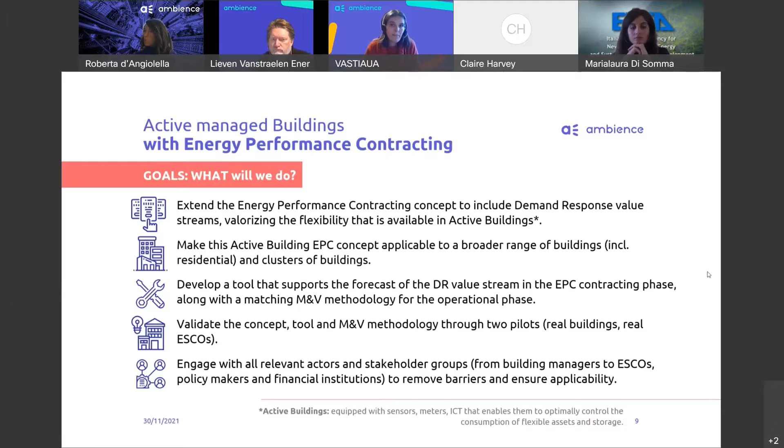Now, why are we doing this? What is the impact of the project? As I mentioned, the first aim of the project was, of course, to reduce the emissions. And we will do that by actively steering electricity consumption to times when the carbon intensity is low. Of course, we also aim to reduce the energy costs. And this can be done by actively steering electricity consumption to times when the prices are low.

Our aim was to reduce emissions by using the electricity coming from renewable energy sources, and therefore we need to leverage the value of active control of flexibility. So we will end up with lower prices and flexibility services. And of course, to have these lower emissions, we need more investments in wind and PV, and we need more demand for emission-free energy. And this we will do by offering flexibility services to deal with the generation variability and congestions.

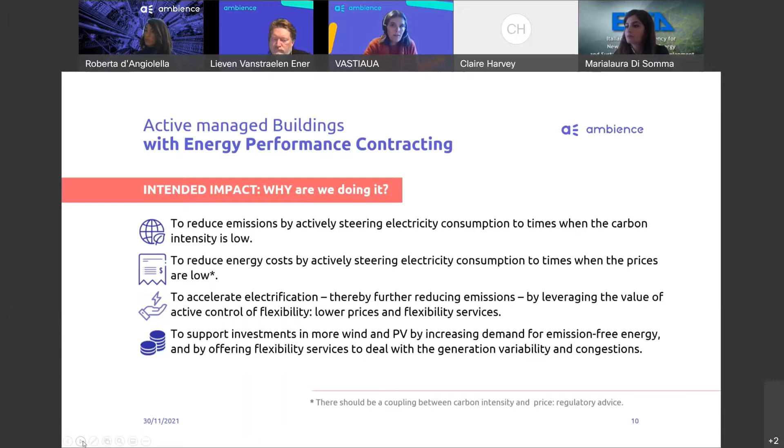Who are the main actors that will benefit from our project? We have four important actors. First, of course, the environment and the society. That's quite logical. If we are able to reduce greenhouse gas emissions by electrification, by using the electricity when the carbon intensity is the lowest, there is a clear benefit for environment and society.

But of course, consumers will also benefit from the project, because due to these flexibility measures, we will be able to shift the consumption to times when there is a lot of renewable energy and when the energy cost is lower. So there will be energy cost savings for the consumers. The energy system stakeholders might have some problems with all these renewable energy sources, but adding flexibility to the system might avoid or mitigate possible problems resulting from the increased wind and solar energy.

And of course, for the ESCO, besides the classic EPC, we offer a new product. We have this enriched active building EPC contract, which has a higher value and is applicable to more buildings. So we actually have a new product that the ESCOs can offer to their clients.

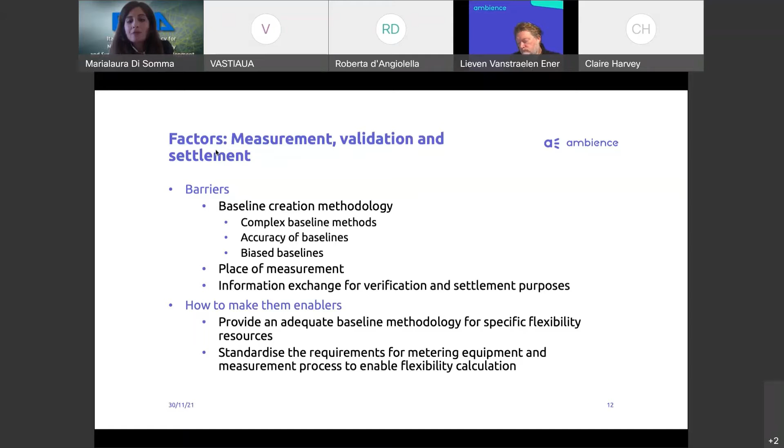And regarding the measurement, validation and settlement, we identified as barriers the methodology for creation of baseline profile, or the place of measurement, or the information exchange for verification and settlement purposes. And we also identified some ways to make them enablers, for example, by providing an adequate baseline methodology for specific flexibility resources, or by providing standards for requirements for metering equipment and measurement process to enable flexibility calculation.

Last but not least, the aspect related to privacy and security. One potential barrier is related to the consent of consumers for accessing and analyzing smart meter data. And of course, in order to overcome this barrier, we identified a possible enabler, for example, by providing clarification of the process of flexibility calculation and deployment.

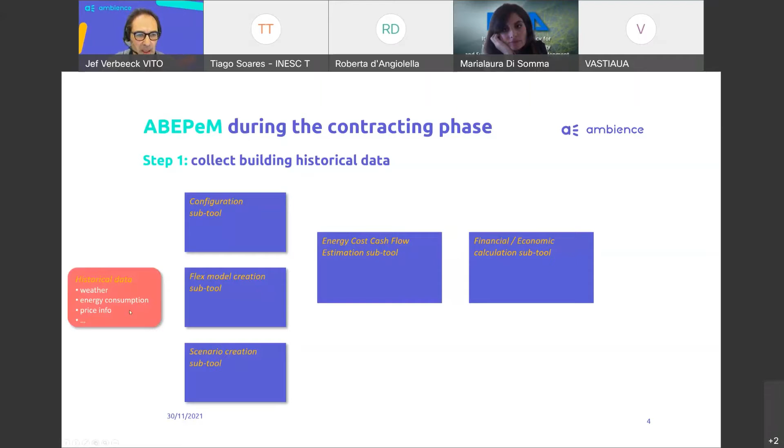The second block is the configuration subtool. And important to keep in mind is that any calculation we do always consists of two parts. We are going to compare two things with each other. So we make a baseline configuration, typically the configuration of the building as it is today. And then we include all the renovation measures in the reference configuration. And then we compare them to each other to do the whole analysis.

So the first step, based on these configurations and historical data from the building, we are going to create a building model. With a building model, I mean really a dynamic thermal building model, a simplified thermal building model, which is capable to calculate the inside comfort temperature of the user as function of time, and of course as function of the outside weather conditions and the heating put into the building, really in thermal power. We make a building model for the baseline as well as for the reference configuration.

Due to the fact that this configuration file contains all the information about the renovation, that information is also given to the financial economic calculation subtool for the investment cost calculation. The financial economic calculation subtool is the more traditional Excel sheet based evaluation tool, which is quite well known in financial and economic analysis.

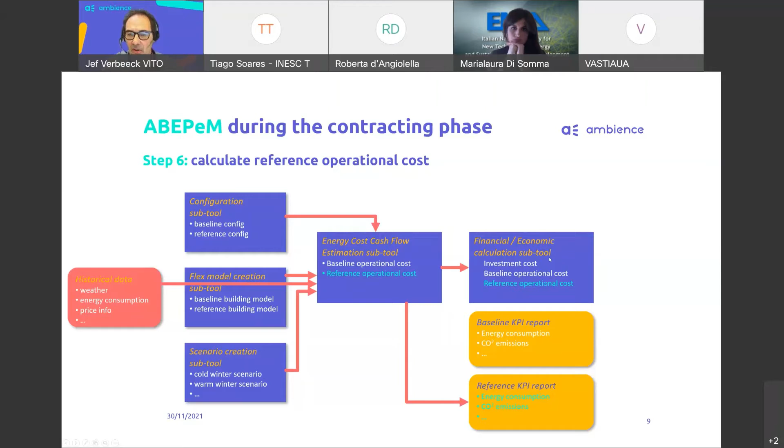That gives then the KPIs of the building after the renovation, and since this information is given to the financial economic calculation subtool as well, and you have them both, you can calculate the operational cost savings. Based on operational cost savings and investment costs, you can make an investment report, and financial people can get all their KPIs out of the tool, net present value, return on investment, financing, and so on. I'm not a financial expert, but I think you know what I mean. So that is the way we use the different sub-blocks in the ABEPeM platform.

A second way we use the ABEPeM platform is, suppose that during the operational phase, after the renovations have been done, there are discrepancies between what was estimated and the reality. It might be that some operational conditions were a bit different, and we could rerun with the energy cost cash flow estimation subtool, do a rerun and correct some KPIs and savings. It is a discussion which is still a bit going on between the partners, whether this is the right way to do so, because maybe it is not transparent enough for the end user, but that's something we try to figure out at this moment.

Good. So that's the top level view of the tool. I'd like to dig a bit deeper in the energy cost cash flow estimation subtool, because that's the one where we consider that makes the difference between a more traditional EPC approach and the AEPC approach we stand for in the AmBIENCe project.

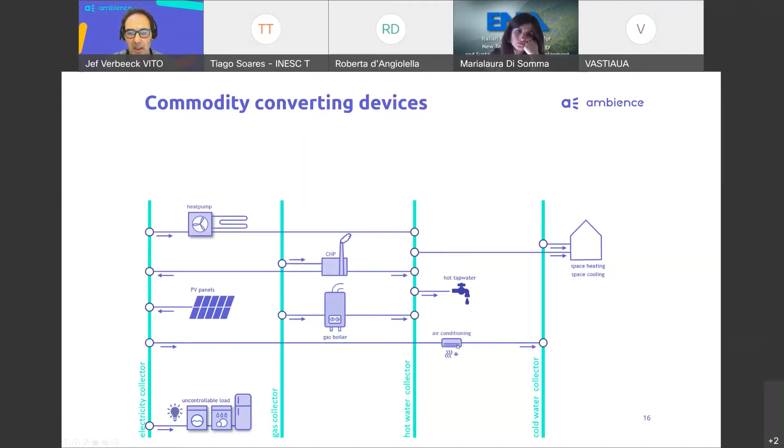A whole bunch of commodity converting devices might be applicable. For example, a gas boiler which converts gas into hot water, a heat pump converts electricity into hot water, and so on. CHP, air conditioning unit, and so on can be added. The next one, and especially in the context of demand response they are very interesting devices, are commodity storage devices. For electricity, that can be a battery. For hot water or cold water, that can be buffer tanks, which can be connected to the hot or cold water collectors.

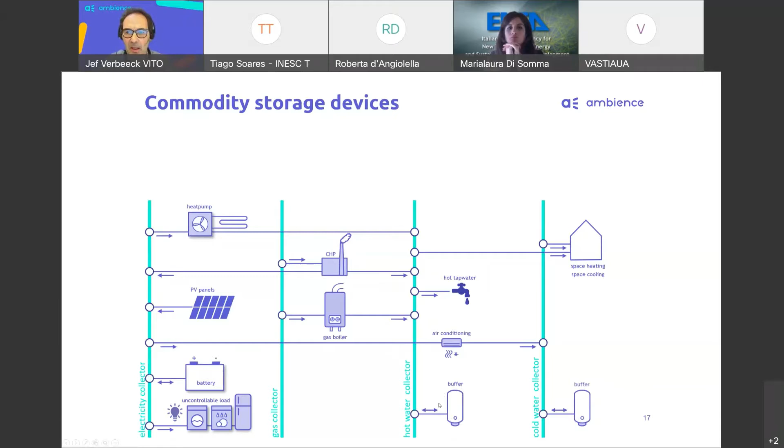So that all together, all these individual blocks are relatively simple models, but by putting them in this matrix structure, we create quite a complex model of how all these devices interact through the commodities with each other. Of course, the building is not a standalone thing. It exchanges commodities with the outside world. So typically you have electricity grid connection. Gas you don't produce yourself, so you need to get that externally. Maybe you can even produce a bit of heat or get heat from a district heating system.

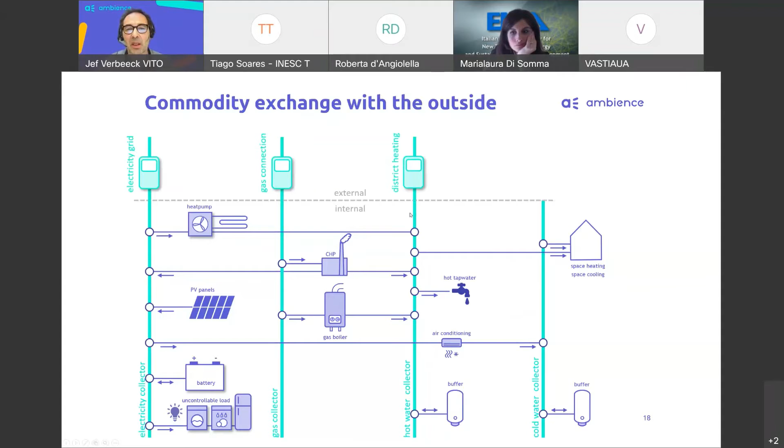Then the next step is that we add cost couplings to the model. Every single connection you see in this schematic, we can connect costs to. The most obvious ones are, of course, the electricity you buy from the grid, or if you inject electricity, you might get a bit of money for that too. Gas will cost you money. District heat from the district heating network will cost you money. Maybe you can inject even a bit of your excess heat and get paid for it. Important to keep in mind, the costs can be not only the commodity costs per kilowatt hour, but also peak prices, capacity prices, and so on can be added to this model.

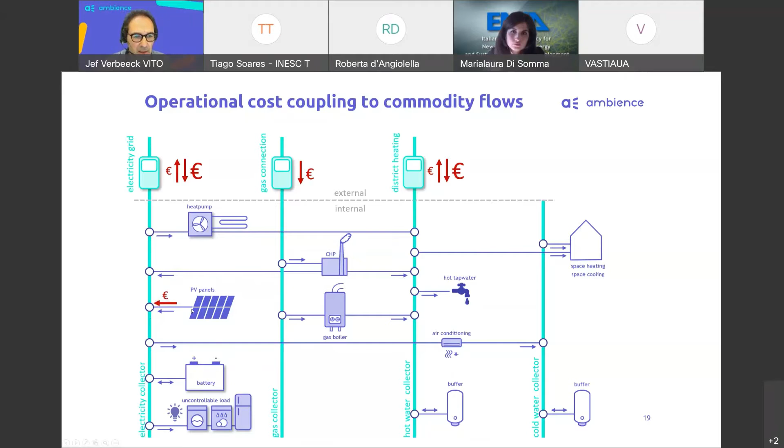Also important is that we can associate costs to each individual internal flow, if that's applicable. To give a simple example, it's perfectly possible that your PV panels were not financed by yourself, but a third party put them on the roof of your building, but you have to pay for the electricity you get from them. Hopefully at a lower price than what you buy from the electricity grid, but it is a possible business model in the ESCO world. So that's the cost coupling. And if you bring that all together, we have one big, what we call building and infrastructure simulation model with a whole bunch of non-controllable inputs, outside temperature, solar radiation, the uncontrollable load, and so on.

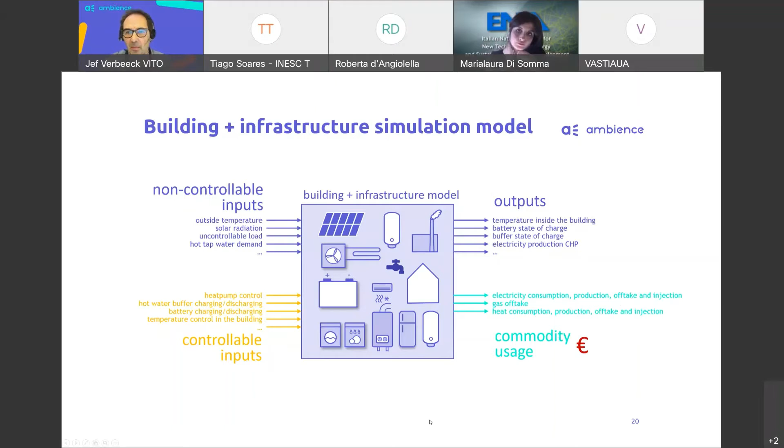We cannot control them in a smart way to make a profit or to reduce costs, but also a whole bunch of controllable inputs. These ones we are going to use to try to get that operational cost down. And then we can calculate all the outputs of individual models, the commodity usage and associated costs, which will be calculated by that simulation model.

We are using that model in three different ways in the AmBIENCe approach. The first one is in the contracting phase, so in the energy cost cash flow estimation subtool, we use it to support the business case calculation in the ABEPM platform. Secondly, in the operational phase, there is a possibility to use model predictive control in the smart control of the building, and that model can be reused. Third, as mentioned earlier, in the AEPC, the guarantee assessment subtool, when some operational conditions have to be recalculated, the same model can be reused again to do corrections on the operational cost savings.

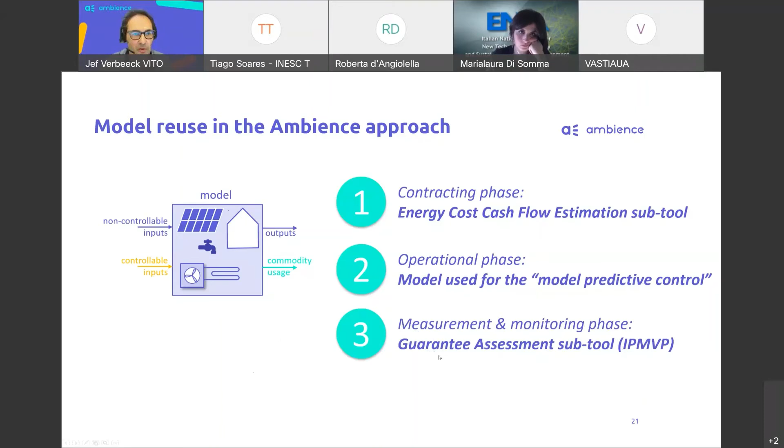If that's still a bit too abstract, maybe it makes sense to give you an example of what we did with the tool. First, I am going to focus on some preliminary results of the Belgian pilot. But first, I'd like to give you a very simple example focusing on data of one day to make it really tangible how we operate with this tool.

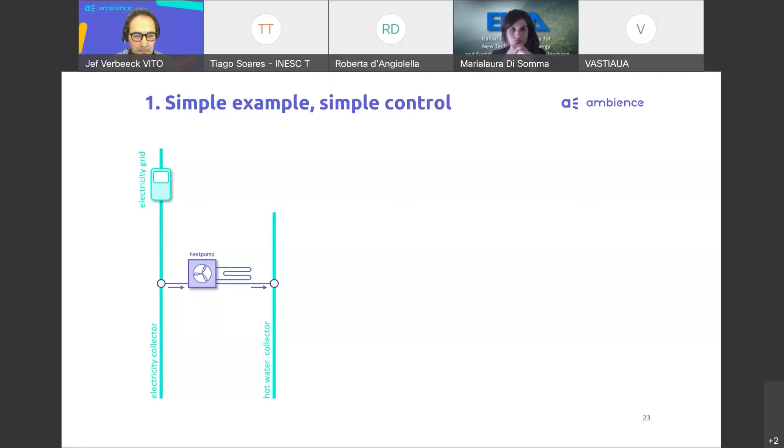We consider the following setup: electricity, hot water with a heat pump, hot tap water, and PV panels in this configuration as well. You see here the PV production for one day. During the day, there is a 29 kilowatt hour electricity production by the PV panels. So it's a time series, per quarter hour we have the data of that.

A bunch of uncontrollable load. So the uncontrollable load over the day is also time series based. You see it's a bit higher in the late afternoon and the evening compared to the night and the morning. Space heating: the heating of the house works via the heat pump.

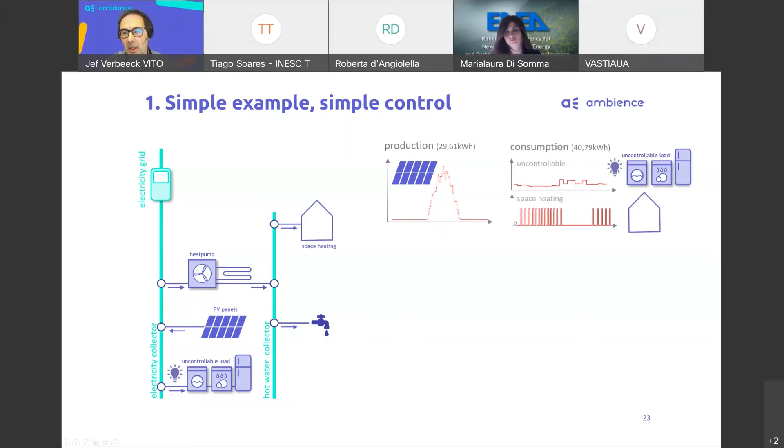With a very simple thermostat, you see the heating switching on and off all the time in order to make sure the house stays at the required comfort temperature of the user. In the afternoon it switches off due to the sunny day, and in the evening it switches on again because it gets a bit colder. So that's the electricity consumption due to the space heating.

The hot tap water boiler, which you see here, switches on a couple of times to make sure enough hot tap water stays available for domestic usage. And then we add an electric vehicle to it, which plugs in at some moment in time and gets charged immediately till it is full. So this is the production of this house.

This is the time series of all the consuming devices. And if you bring that all together, we come to a situation, if you don't do anything smart, that a lot of the electricity production of the PV panels is just injected into the grid and not used by the local devices, which results in a typical situation where more or less two-thirds of your PV production is injected into the grid and only one-third is self-consumed.

That's what we can call the baseline simulation. Now we are going to add smart control to the electric vehicle, the space heating, and the boiler. Of course, the production of the PV and the background consumption stays exactly the same. So you see what happens: the space heating heats just the bare minimum during the night to just reach the comfort level of the end user. And here it starts taking advantage of the excess PV production in this area to preheat the house, or the building, for later in the evening when the sun disappears.

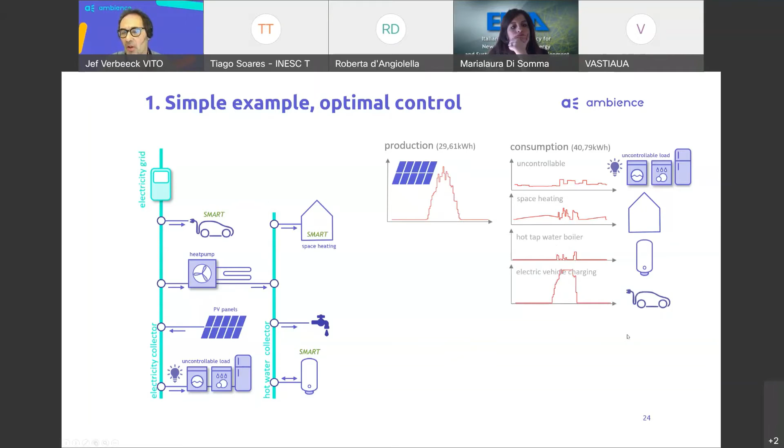The hot tap water boiler does exactly the same. It makes also use of the PV production, and the EV smart charging is way better aligned to the PV production. Of course, this is a constructed example, but you see exactly what happens due to the fact that you do all these things in a perfect, smart way. You can avoid any injection to the grid, and you can use all your PV production locally.

It's a very simplified, a bit exaggerated example, but what I wanted to make clear with this simple example is that if you do not have all these time series data available, it is very, very tricky to calculate this operational cost savings for implicit demand response in a calculation tool. And that's the reason why we have a very much data-driven approach in the operational cost savings module of the ABEPM tool.

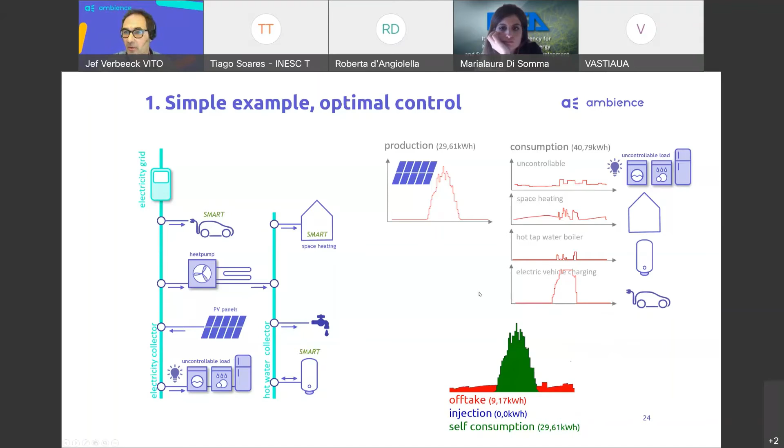To conclude, some preliminary results we achieved in the Belgian pilot case study. The situation is a bit similar as I showed before, but these are calculations on real data for a whole year. So it's again electricity, gas, and hot water with a bunch of uncontrollable loads, space heating, and gas boiler.

Electricity consumption is from a residential house where there is quite a bit of self-employed activity as well, resulting in an electricity consumption split in two zones in a time of use tariff. In the peak time about 3,000 kilowatt hours and off-peak 5,300. We used realistic thermostat settings where we keep the temperature in the building above 20.5 degrees during the day and above 15 degrees during the night.

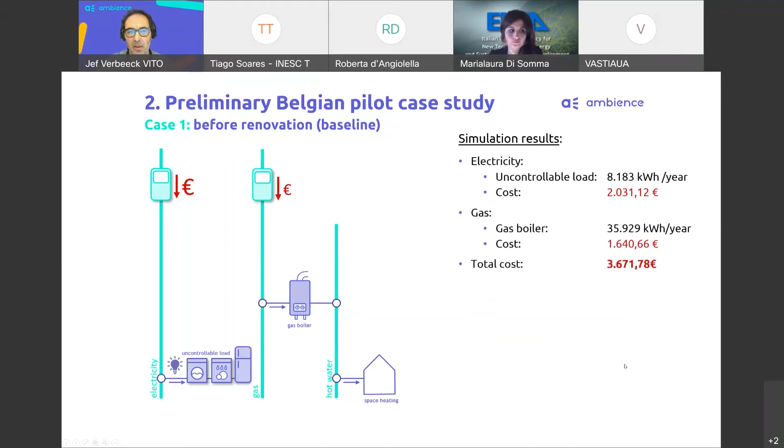A gas boiler with an efficiency of 92% with a gas consumption of 35 megawatt hours. That's the baseline setup. Electricity prices used in this simulation are 30 cents per kilowatt hour in peak and 21 off peak, 4.5 cents for gas. That results in a yearly electricity cost of about 2,000 euro and a yearly gas cost of 1,600 euro, in total 3,671 euro. So that's the baseline calculation.

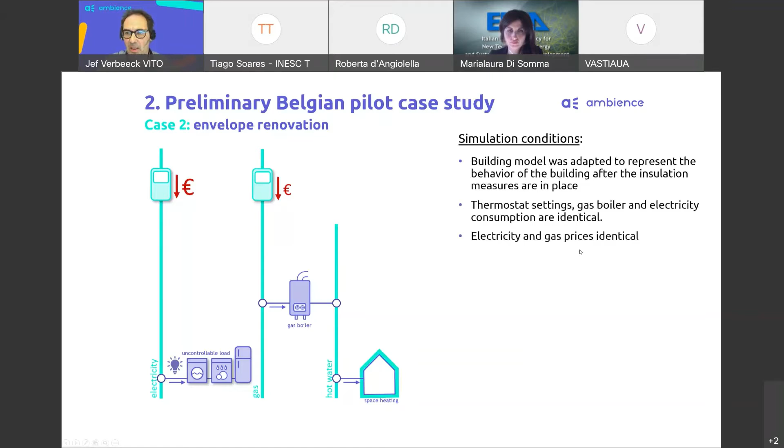The second one is where we are going to implement the envelope renovation. So we're going to insulate a house. We adapt the building model accordingly. All the rest of the settings, prices, and so on remain exactly the same, which will result in the same electricity cost, but in a reduced gas cost, leading to a cost saving, operational cost saving of 26%.

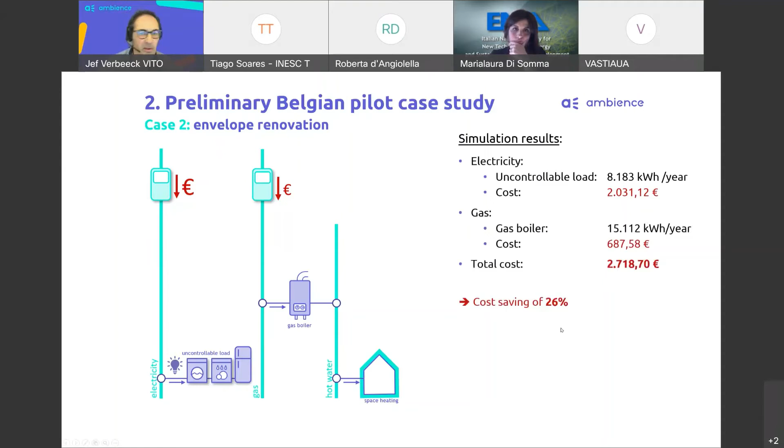The next step is the electrification and introduction of PV. We replace the gas boiler by a heat pump and PV panels are added. A 10 kilowatt peak PV is added, and we assume an injection price here of about 6.7 cents per kilowatt hour. The thermostat settings, electricity offtake, and gas prices remain identical in the rest of the calculation.

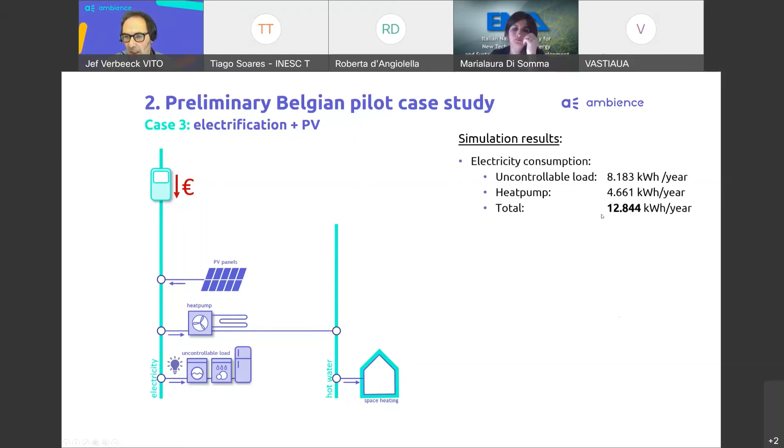You will see that, due to further electrification, the total electricity consumption goes up to 12,000 kilowatt hours per year, resulting in an offtake cost of 2,465 euro. You have a bit of an injection volume, so 4,000 kilowatt hours is injected into the grid, resulting in a total operational cost of 2,184 euro, or an additional cost saving of 20% compared to the previous situation.

As in the previous example I gave, we are going to add an electric vehicle as well, which is a bit the idea of the building owner, that will be added in the near future. We assumed, and that's why I said these are preliminary Belgian pilot case studies, not really up to date yet. We still have to recalculate these things. In this example, we assumed about 20,000 kilometers a year, a 10 kilowatt charger, and a standard kind of commuter profile.

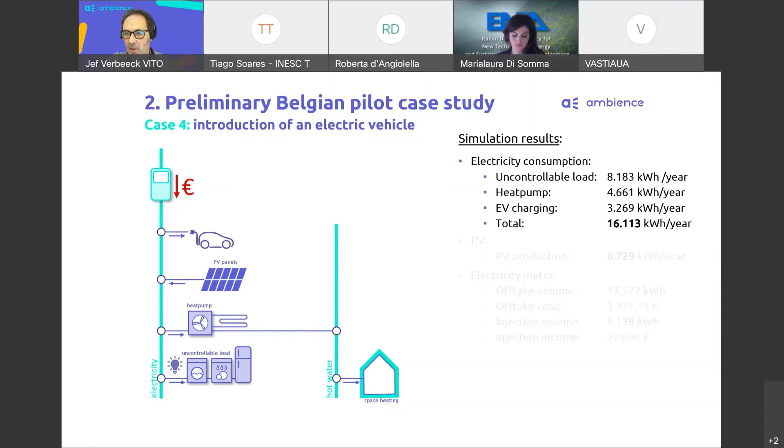We assume that if you don't do anything smart, you start charging straight away when you arrive at home. All the rest stays the same. So it shouldn't surprise that we have an additional electricity consumption of 3,000 kilowatt hours per year and a total cost now of about 3,100 euro a year.

And now the strength of the operational cost calculation module comes forward, because now we are going to implement smart control on the heating system. So we allow the temperature in the building to vary for 1 degree during the day between 20.5 and 21.5 degrees if it is financially interesting to do so. During the night, we allow as well to preheat if that's financially interesting.

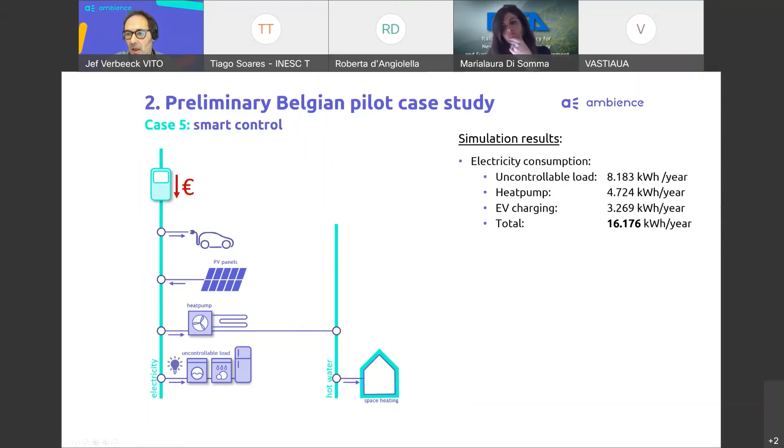The electric vehicle charging, we try to charge now at the cheap moments when there is PV injection or at low prices, and the rest stays identical. The prices stay identical. What you can see then is that the total electricity consumption goes even up a tiny bit, and that's quite a bit of a misconception. Sometimes smart control can really lead to a higher electricity consumption, and in KPIs we have to be very careful with that. But of course, now we reduced our injection volume, and the total operational cost is dropped due to the fact that we significantly reduced the injection in the grid, and the cost is further dropped due to moving some of the electricity consumption during the cheaper night tariff, reducing the operational cost by another 12.5% only due to smart control.

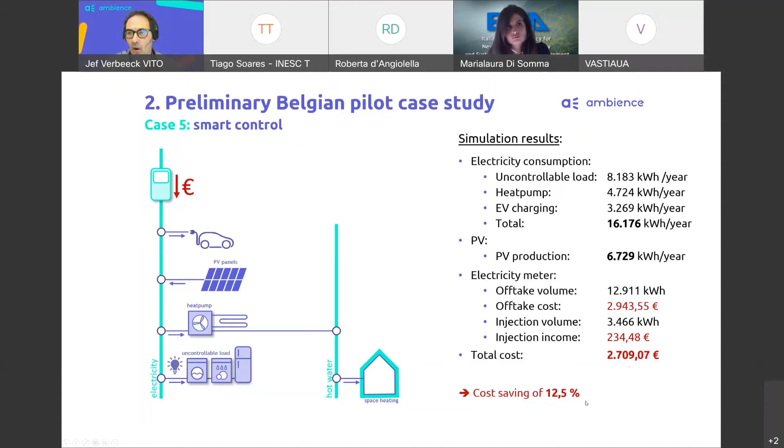So that concludes my part of the presentation. I hope it was a bit more insightful what we try to do in the tool, and I welcome your questions in the chat. Thank you.

Thank you, Jef. So actually, there are a couple of questions in the chat box. I don't know if we want to address them now or maybe in the roundtable discussion. Yeah, maybe in the roundtable discussion they will come back as well. I would leave them till the end, maybe. Okay, great.

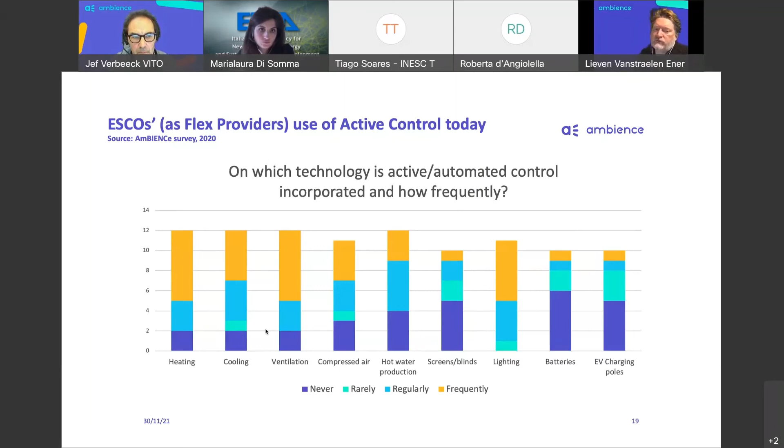And if we look at the technology in which active automated control is already being used today, without much surprise, that's mainly HVAC, heating, cooling, ventilation, to some extent lighting and lighting control, and then the others less frequently, with some potential still for hot water production. And it shows clearly that we are focusing, I think, on the right technologies to be incorporated.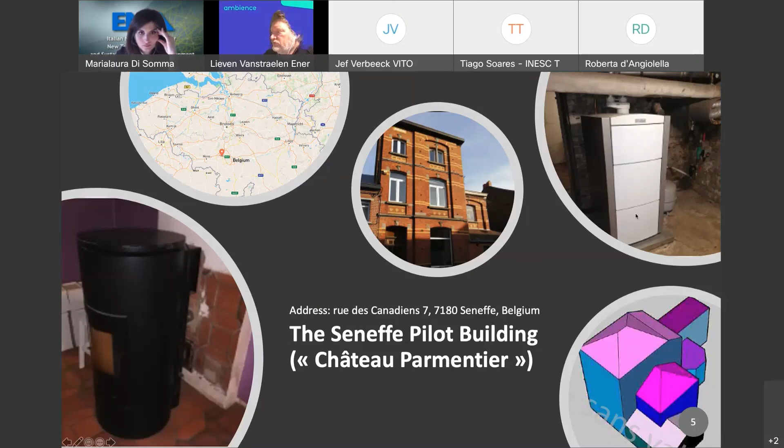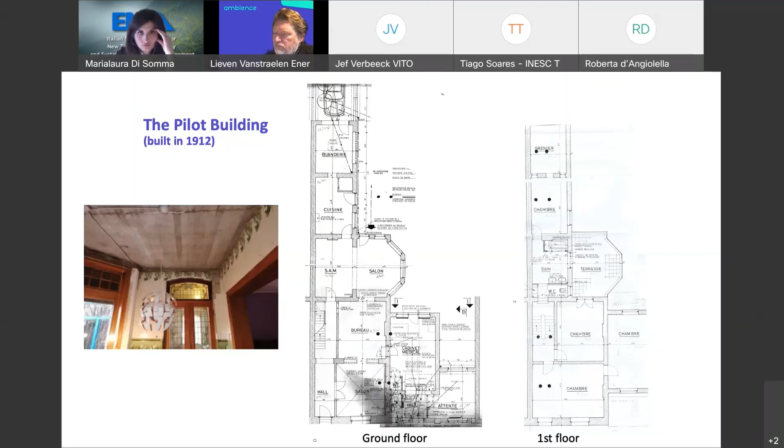That's an annex that has been added in the 1970s and has served as a waiting room for a doctor's practice. And then you see on the left side the heat pellet stove, and on the right side the gas boiler, which was installed in 2016. Here you see some floor plans and some more indications, including a ceiling, for example under the terrace, that has not been insulated yet, but which is foreseen in the renovation program.

So flexibility potential mainly comes from electrification with the heat pump to replace this gas boiler, PV panels on the main and secondary roofs and on some walls, and then the electrical vehicle that Jef mentioned, planned for next year. For the moment, planned with what we call vehicle to load, but the idea is eventually to also have vehicle to grid capability or vehicle to home capability.

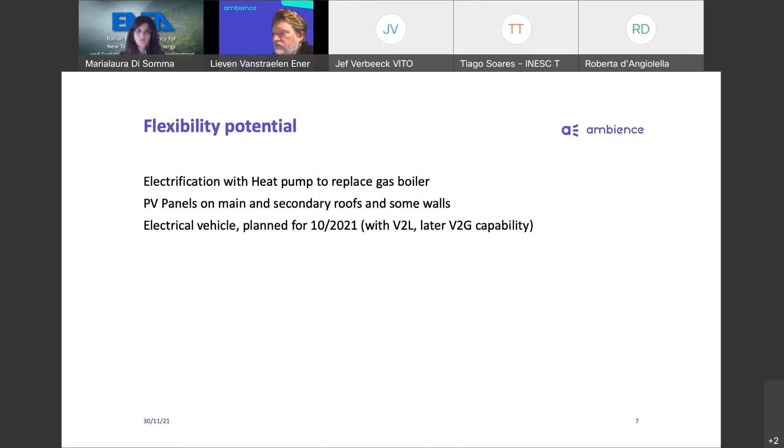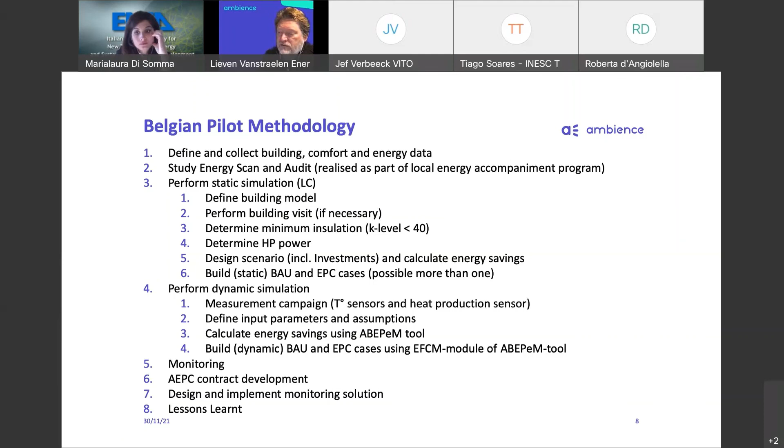The methodology, I will not go into more detail, but basically starting from defining, collecting data, an energy scan and audit was done, of course, based on theoretical assumptions. And there was a static simulation aiming at insulation levels and defining the investment cost, the dynamic simulation that Jef mentioned, and then the monitoring infrastructure that is going to be installed and studied shortly. Of course, the AEPC contract development, and then design, implementing the monitoring and doing an evaluation of the lessons learned.

This is a view of the energy scan and energy audit, which was done. Not go into detail. Here you see some of the results of the static simulation. All of the U and R values have been calculated, and you see the placement of the solar panels on the right side. Purpose was to target a K value of 60 for the insulation, everything leading up to total investment that provides an energy saving roughly between the base case and the scenario from these 31,000 kilowatt hours to 13,000, so roughly 60% savings.

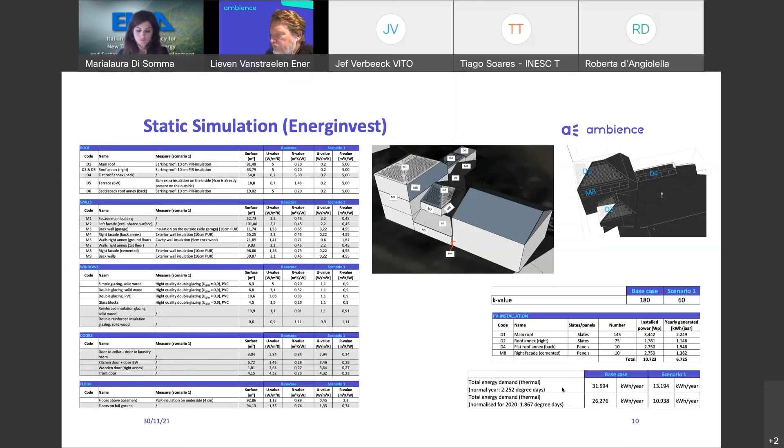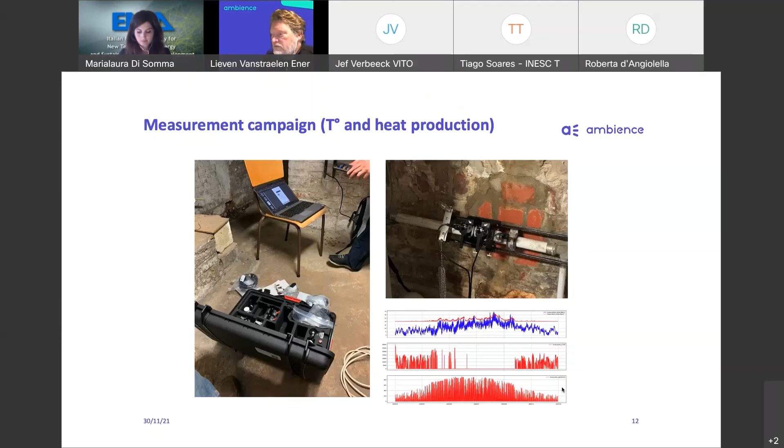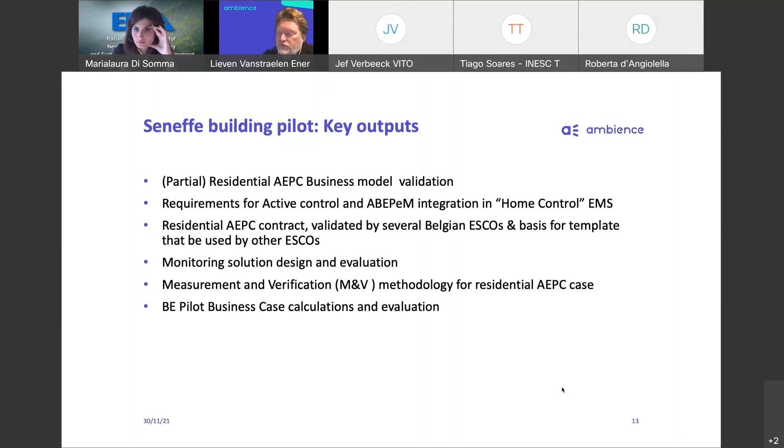And so what will we have as results from the pilot? Of course, validating the AEPC business model, also defining requirements for active control in an energy management system. We will have the residential AEPC contract, which will not be signed within the framework of the contract, but it will at least be evaluated by some Belgian ESCOs, and it will be a template for use by others, of course. We will have a monitoring solution designed and evaluated, as well as an M&V methodology. And finally, the business case calculations using the EFCM tool and the economic and financial calculation tools will also be made for the pilot. And that's it for me.

And I think it's now Claire who will provide the presentation on the Portuguese pilot. So I will share my screen then. Okay. I hope you can see the screen. Not yet. Not yet. Yes, not yet. Yes, I think. Yes, we can see it. Okay, perfect.

Okay, yes, I will try to be quick with my presentation. I know we want to have a discussion, so last presentation I will try to go through quite quickly, and please leave any questions in the chat so we can get to them in the discussion. So I'll briefly talk about the Portuguese pilot. First of all, yeah, thanks for having me here.

I'm Claire Harvey from EDP New. We're an R&D department of the Portuguese utility EDP, which operates in not only Portugal, but other countries across Europe and the world. And one of its branches is an energy retailer. And within that, they also have an ESCO service.

So we're in charge of the Portuguese pilot. And a few details on the Portuguese pilot building. It's in one of our EDP headquarters in Porto, in the north of Portugal. It was built in 2011 and has no implemented EPC as of now.

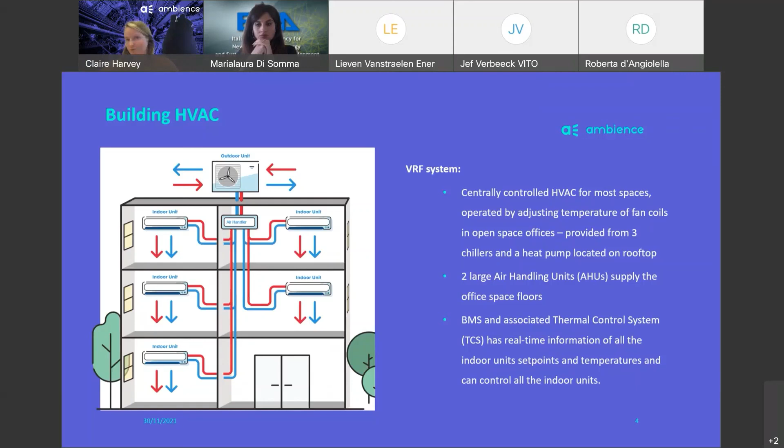And there's a BMS, building management system, and associated thermal control system in the building, which has real-time information of these indoor units, set points and temperatures, and can control these indoor units, but as of now, manually through the building operators.

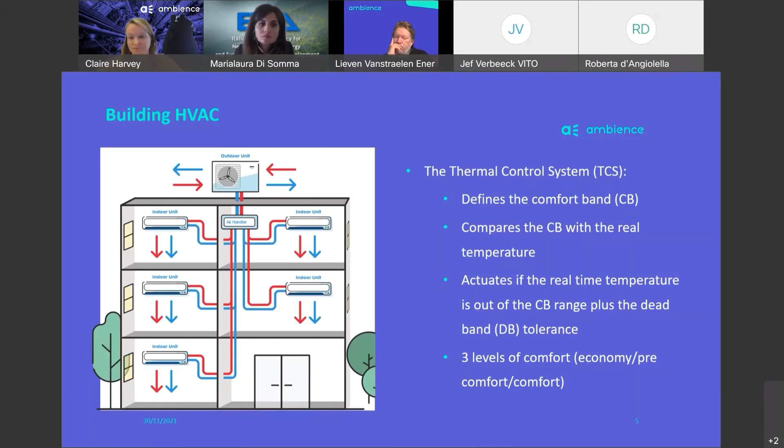So yeah, the thermal control system itself, as it is right now, defines a comfort band within the office spaces. So it compares this comfort band with the real temperature in the space through temperature sensors. And then it actuates the heating or cooling if the real-time temperature is out of the comfort band range, plus a small tolerance. As of now, the building mainly works in 3 levels of comfort. So you have economy, pre-comfort, and comfort levels for the office spaces.

So why am I discussing the HVAC so much? So that's the flexibility asset that we are studying more in detail in the AmBIENCe project. So to make use of the flexibility of this HVAC system, we're basically building the models so the building can act as a thermal battery, taking advantage of the thermal inertia in the building, and basically shift the energy consumption of the heat pump and the chillers across different periods through active control, as has been already spoken about.

As was also spoken about, the demand response market in Portugal. As of now, what we can do to take advantage of demand response is through different time of use energy tariffs. So in our pilot in Porto, we have 4 different tariffs throughout the day. So basically the HVAC will be optimized to make use of this and save money for the building owners.

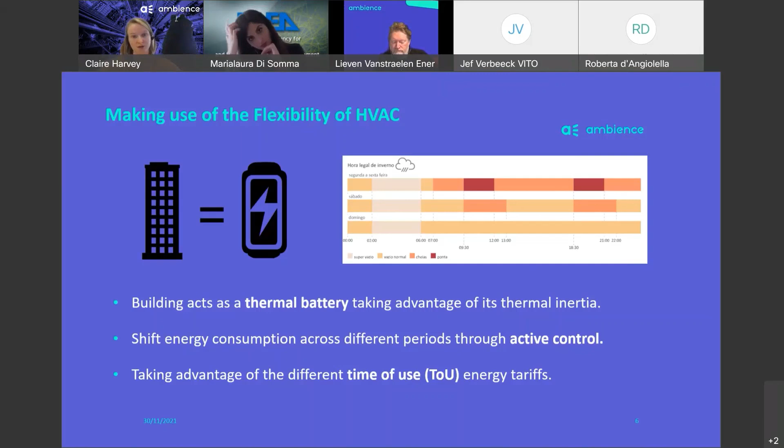As well as this, we have some classic energy efficiency measures studied and associated investments and payback periods, but I'll not go into them right now, because the Porto building pilot key outputs from our demonstration will be these business models that combine not only the classic energy efficiency measures, but also these demand response flexibility measures for optimized control of the building assets, while also maintaining these comfort levels that I spoke about.

Another key output from our pilot work will be detailed requirements for this active control for this operational phase to function. So software and algorithm integration. You've seen the tool from Jef, but how this integrates into local hardware and monitoring solutions, and developments on top of building management systems to allow for this actuation of these active control measures.

Another key output when we're implementing this in the pilot is the collaboration between various stakeholders. So it's not only our research project team, it's also asset management, building managers, building operators, etc., in order to realize this concept. And another key output will be this template AEPC contract, as Lieven spoke about, which will include all the relevant technical clauses to be used for the Porto building, but also as a template for our ESCO department in EDP.